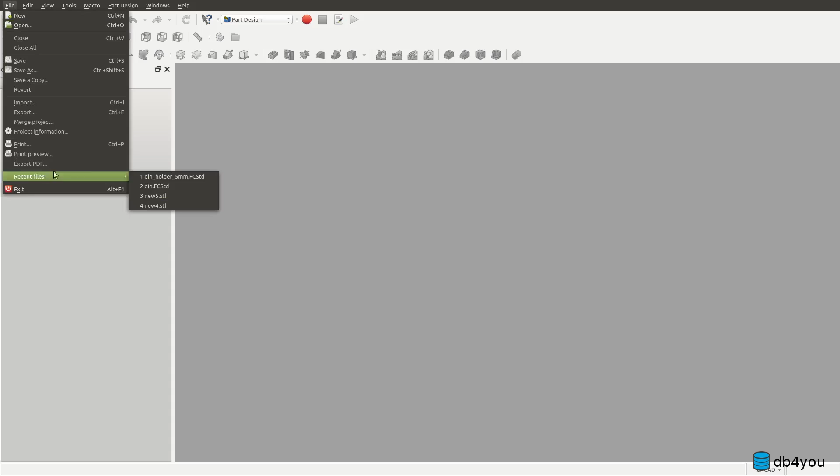Today I'm going to get back to my previous first parts that I've made using FreeCAD. This is, for everyone not in the loop, a DIN rail holder. Basically the bottom bits stick to the wall, and you use two screws, I think M5s, and this little slit - you put in your DIN rail and two screws go in.

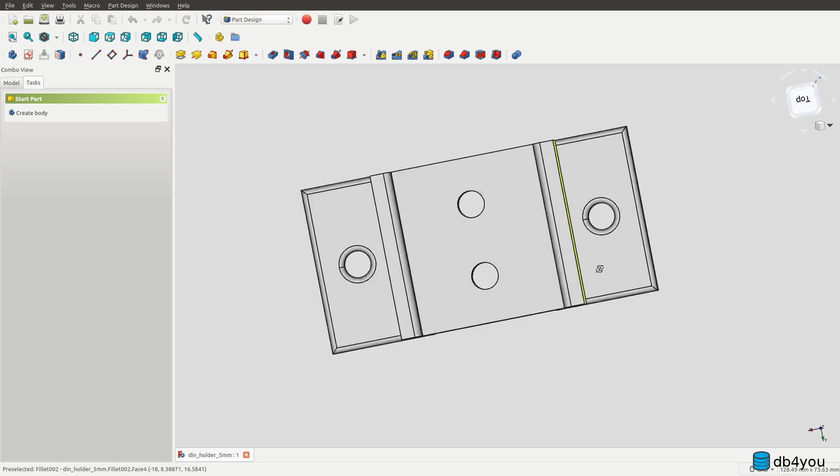Now, as I already mentioned, this is the 5mm bolt, but I also need an M3 - the 3mm bolts. How do you do that? Well, I'm going to compare what to do in FreeCAD and how it can be done in TinkerCAD, just so you have a comparison.

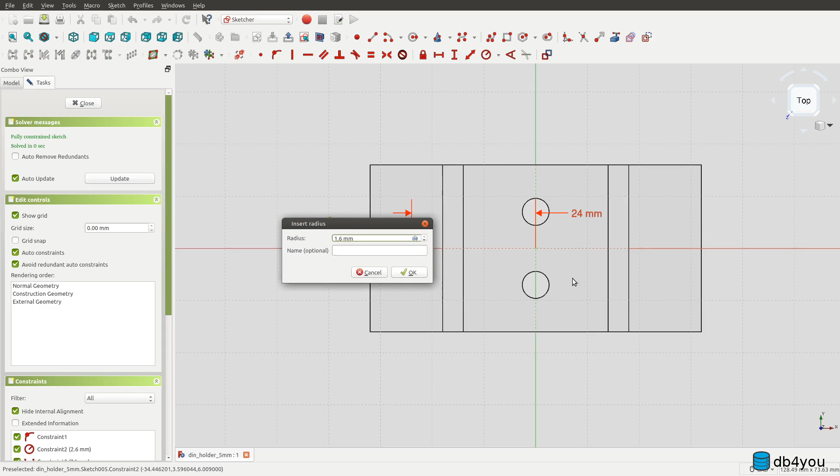So here it's gonna be rather easy. I got the names of the relevant holes, so just go to the left hole. Now double click, change it to 1.6mm, because that's just the radius. Boom, done. Close. See, already much smaller and exactly what I'm after.

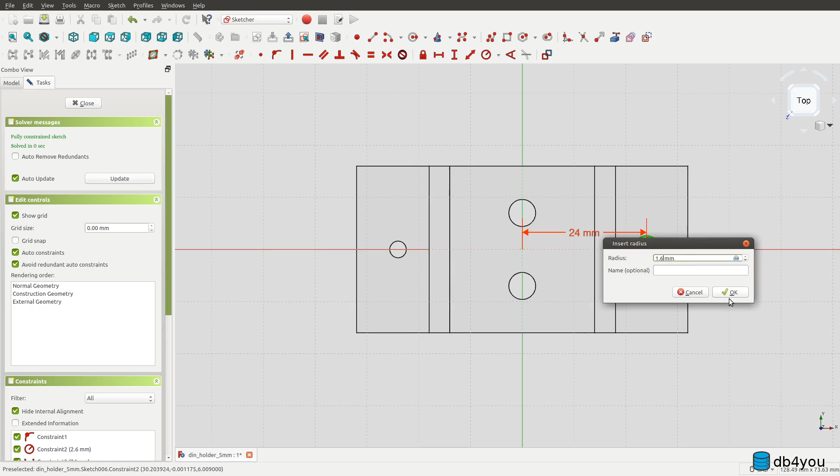So right hole, boom, 2.6mm - because it was the 5mm hole, now 1.6mm radius. Boom, done. That's literally it. You're done. That's it. Took me what, 30 seconds.

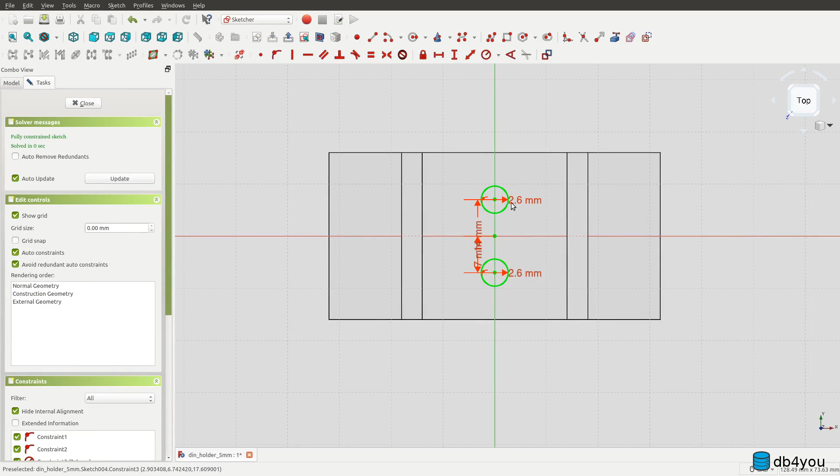So now, also, if my DIN rail has a different slit width, I can adjust that rather easily. Same thing, nothing changes. 1.6, boom, and 1.6mm, and you're done. Close, changed, all updated, ready to be exported and 3D printed.

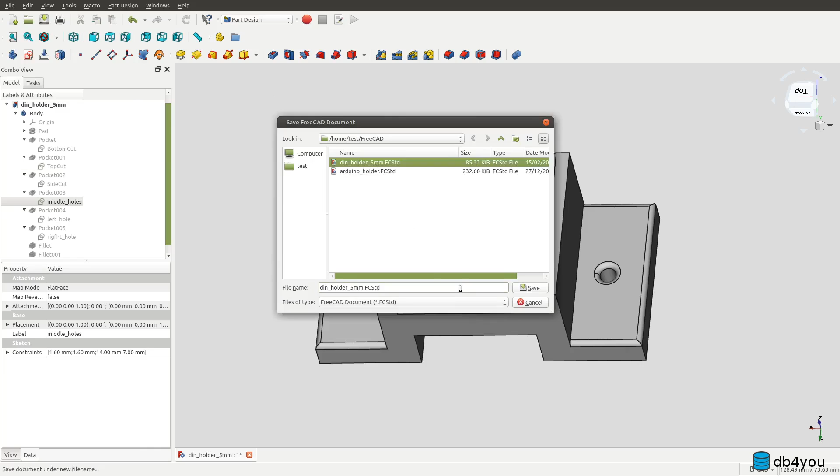Yeah, this is all. This took me literally, if I wouldn't be jabbering and just doing it because I have to get it done, that would be like a 2-minute job at the worst. So there you have it, that's how you get a job done in FreeCAD. So easy, I love this. This is a boom game changer for me.

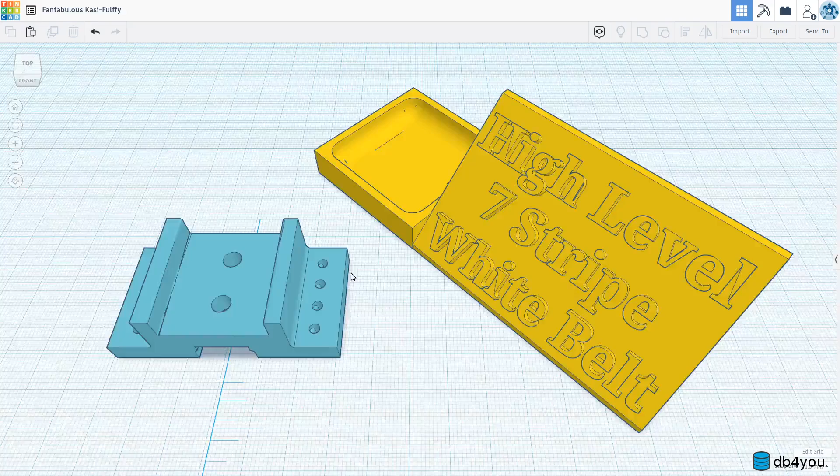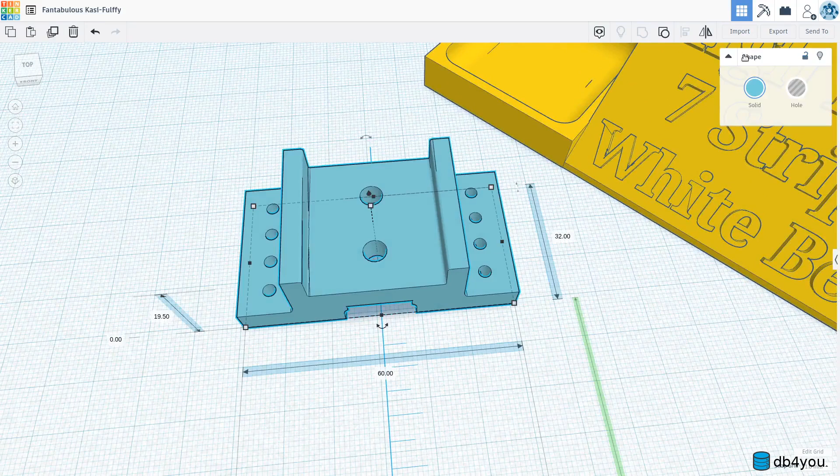But because I'm comparing two tools, I got some of the FreeCAD - well, TinkerCAD. So now how would I change the hole sizes in this one? So it's a similar contraption designed in TinkerCAD, as you can tell. So obviously you have to ungroup these things. Now the problem starts if you have to ungroup it several times to get to the bit you're after.

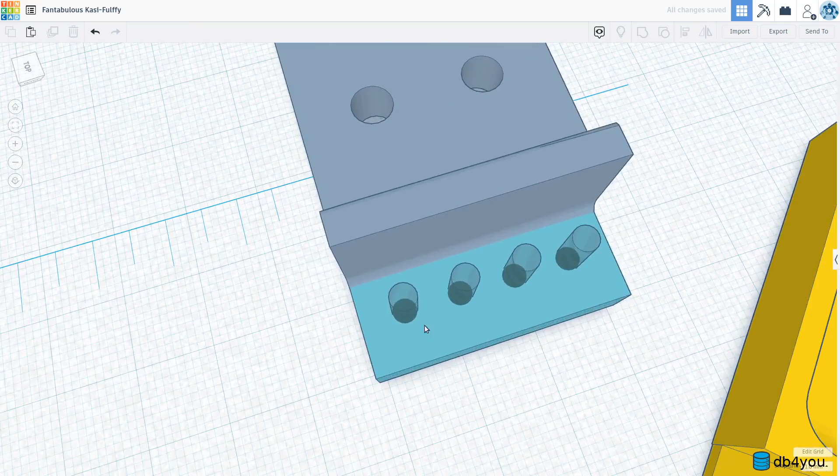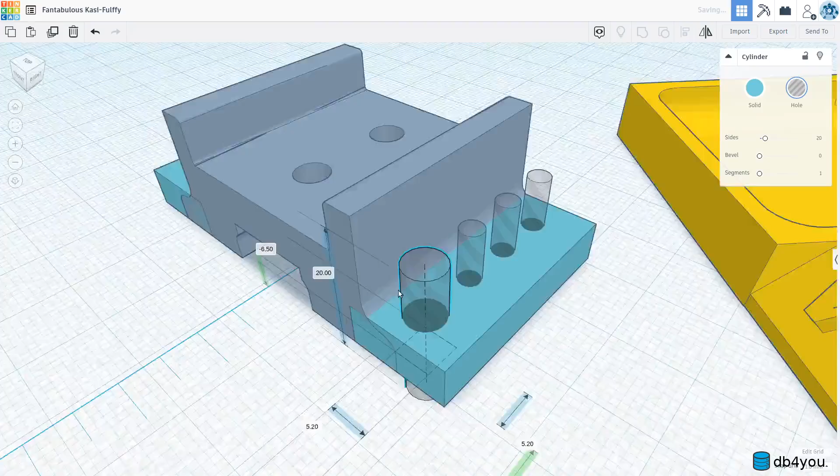So it could be that I need to ungroup this to get the fillings. Also now they are grouped, I need to ungroup them, and now I need to separately figure out what are the sizes. So for example, as you can see, these are 3mm ones. If I want to change them to 5mm ones, I need to adjust it on two sides, but obviously the length and the width, I need to now change it to 5.2, and now I need to realign it.

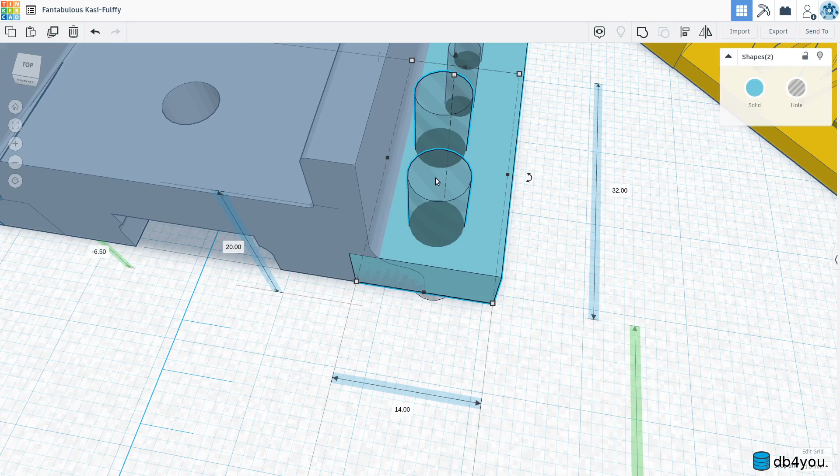And figure out if it's all gonna be good with this. So now I need to do it to an individual hole, which is not a problem that it's individual - the problem is that it's not in the center anymore. So I probably need to select this block, select these two, get the alignment tool, get it aligned. Now is it in the middle? Should there be this bit of a gap? Should I probably move it more to the right? You can see it's a massive faff.

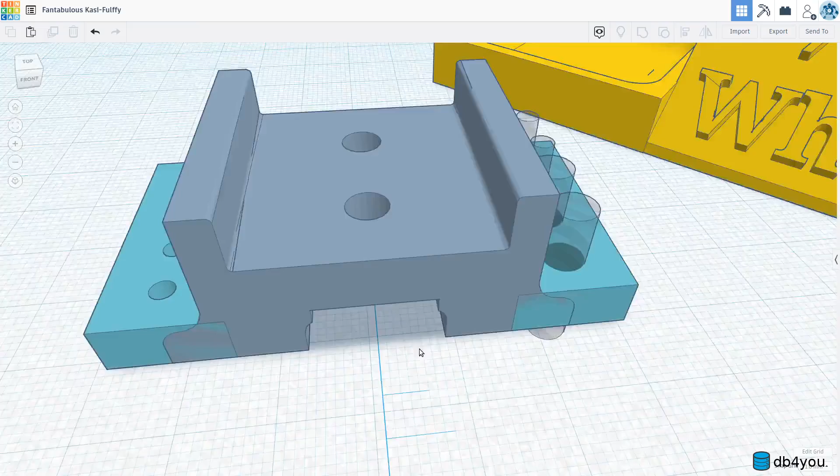And this is just a tiny little part. So I don't know how many times do I need to go back. Oh, here we go, this is a bit more complicated part, it has some cutout at the bottom. And I need to go back again. Check if I can redo this one. No, I can't redo this one.

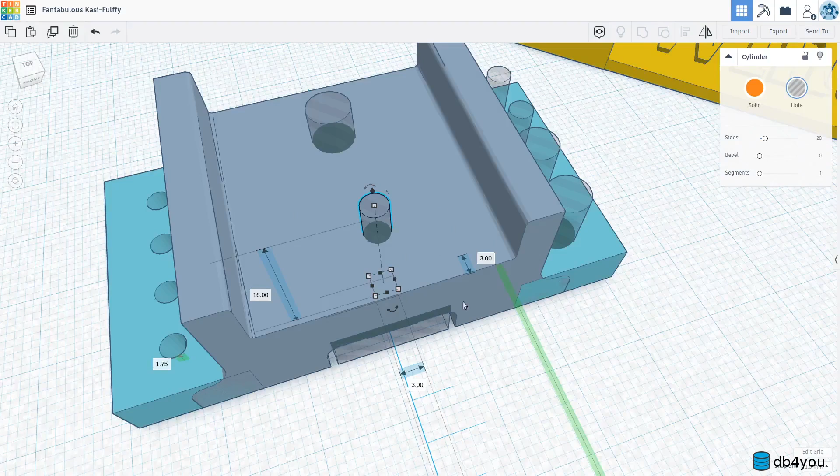It's 5.2, sure, but I want it to be 3 millimeters, just for argument's sake. And now I have to go with the 3 millimeter here, change it to 3 millimeter here. But now I most likely lost the alignment here, so I'll have to figure out how to align it properly, and it's not gonna be in the same distance in relation to the other hole.

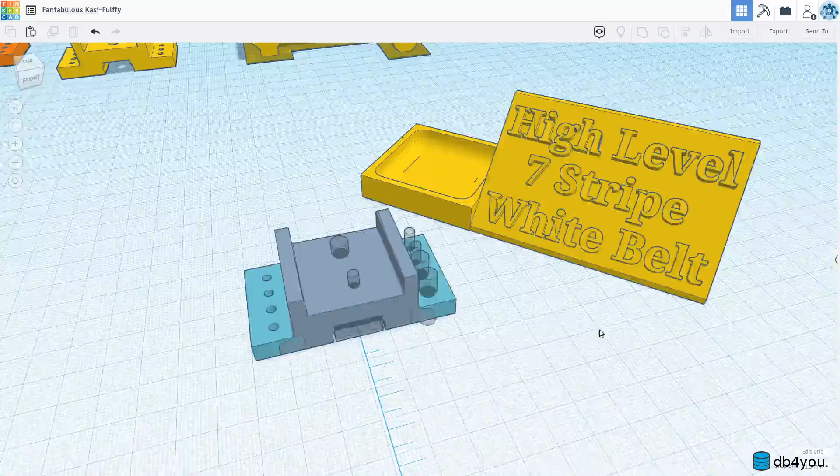Yeah, so as you can tell, TinkerCAD, as good as it is for certain things, this is a major pain if you have a more technical project. However, I still think that TinkerCAD is really good for things like this. This was a breeze to design in TinkerCAD.

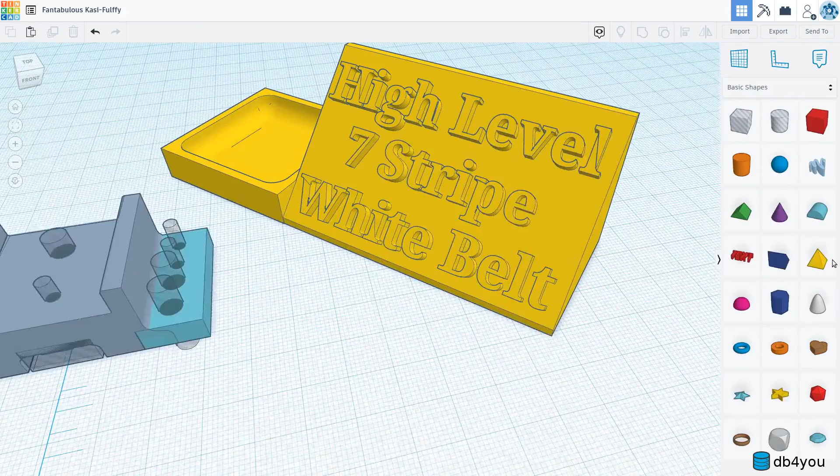You get a little triangle, or half of it, whatever it is, I don't really remember, and cut it out at 45 degrees. Use the text option - get some text in, get it under the angle I want, 45 degrees, align it with the object, group it, all good, hunky-dory, printed. That was like, I don't know, 15 minutes tops.

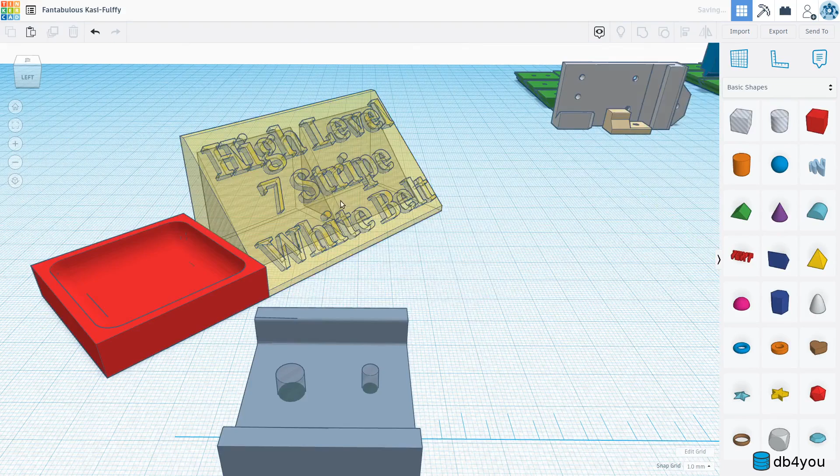And I think I hollowed it out on the inside. Yes, so I had to hollow it out because obviously for 3D printing, I don't want it to be filled on the inside totally. So yeah, I think TinkerCAD still has a use for things like this - let's call it that creative stuff, quote unquote.

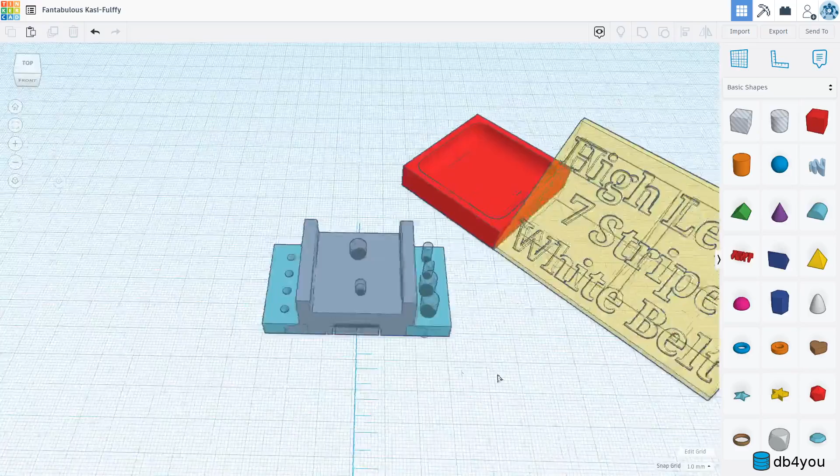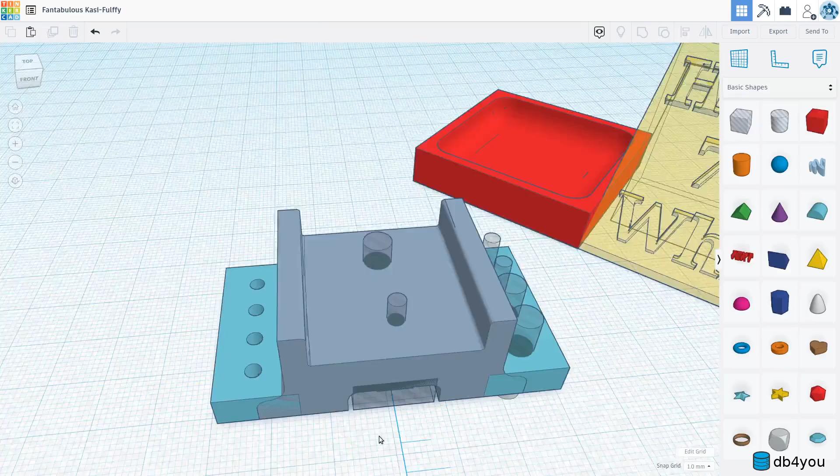However, for more technical prints and things that you want to do, this is starting to be cumbersome, and this is just an easy part. When I was designing my IoT enclosures, if you want to make a change anywhere, it's kind of problematic because of all the things you have to modify and ungroup, yada yada yada.

So good for simple creative stuff. Yeah, I think TinkerCAD is great, and TinkerCAD did get me by, and eventually I'm here. So I find this to be super amazing, and also, as you can tell, these cutouts, these what they are called...

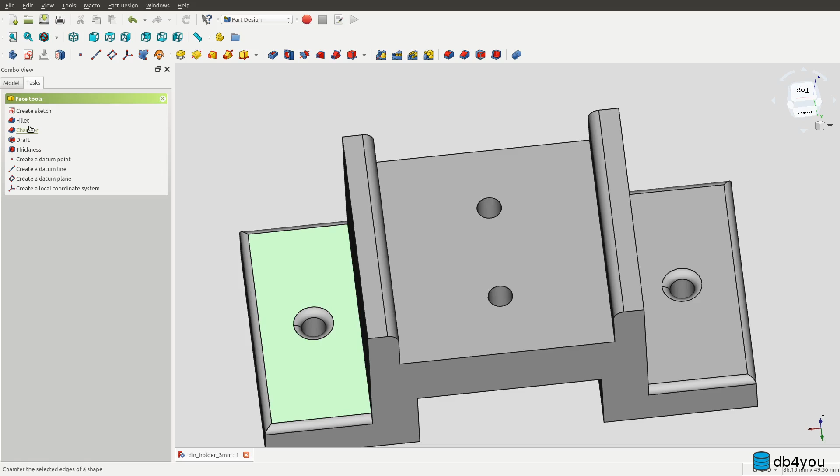Pockets, no... for crikey, chamfers and fillets, that's the one, that's what I was looking for. They get automatically adjusted whenever you change the size of the hole or diameter. So yeah, I think it's amazing, and it's literally a godsend for someone like me that is a hobbyist and wants to design and print some useful parts for the stuff I do.

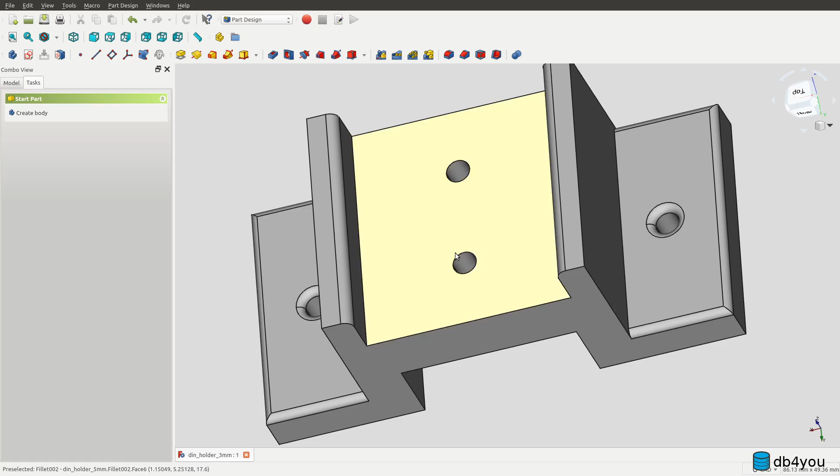And this is just a game changer, saves so much of my time. And yeah, that's what I wanted to share with you today. So TinkerCAD, really good if you want to just play around, mess around, maybe do some creative kind of stuff that's not restricted by any constraints of size or particular dimensions. And on the other side, you have FreeCAD, where you actually can design some serious parts with some awesome precision, and modifying those parts is not a hellish experience.